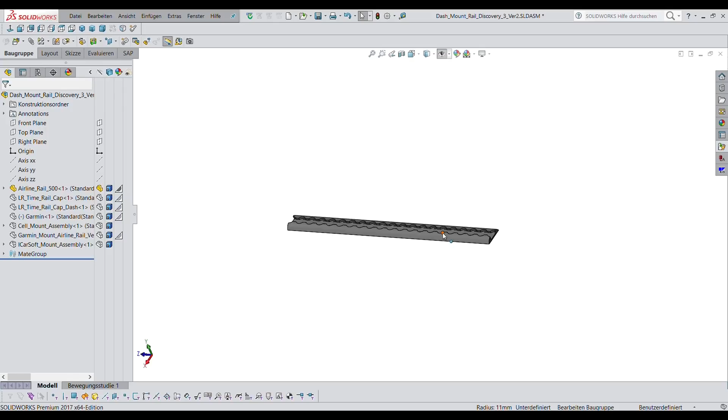You happy? Yeah. I want to show you our new airline rail dash mount setup. You think that's the right name? Yes, I think that's the right name.

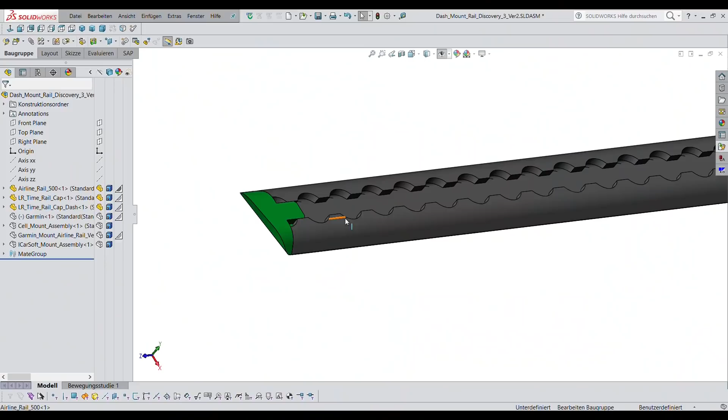I started out with a model of the airline rail, and then I added the end caps we already used before in the other video. But the one end cap on the other side needed a special shape. That special shape was not so easy to design, even if it looks like a very simple piece here.

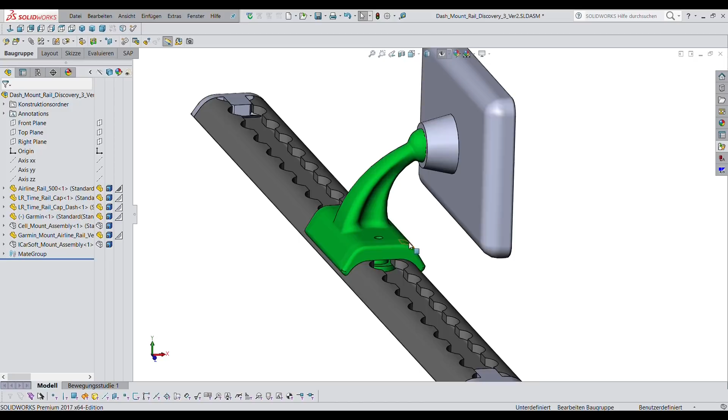The first thing I had to do is get our Garmin unit into the picture, and then I designed a mount for the Garmin unit. This mount is derived from the original Garmin windshield mount, and I just changed it a little bit to be able to fasten it to the airline rail.

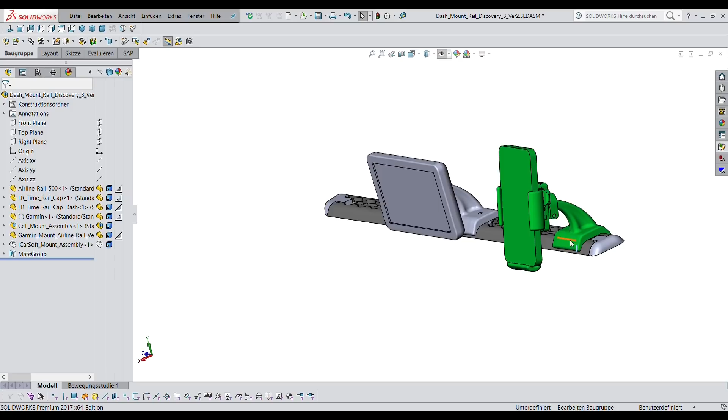Then I derived from this a cell phone mount for your cell phone. You're gonna get your own cell phone mount, and that is a way more complicated thing. So I mounted it all the way to the side. I wanted to have it in a way where we can install two different sizes of cell phones.

I wanted it to have the cell phone nicely centered, and I installed this mechanism here. So you can adjust it, and it's spring loaded for the two different cell phones.

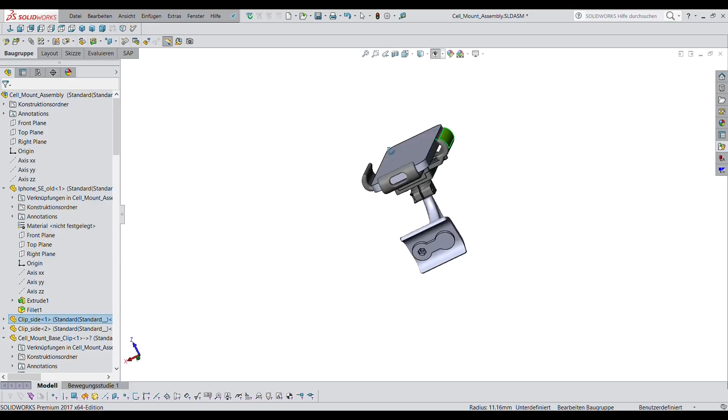I also put a little opening in here for the plug, and here you can see how it's fastened to the airline rail. So you just push it top down into the rail, slide it over a bit, and then there is a little M4 screw with a thumb wheel that you can tighten here.

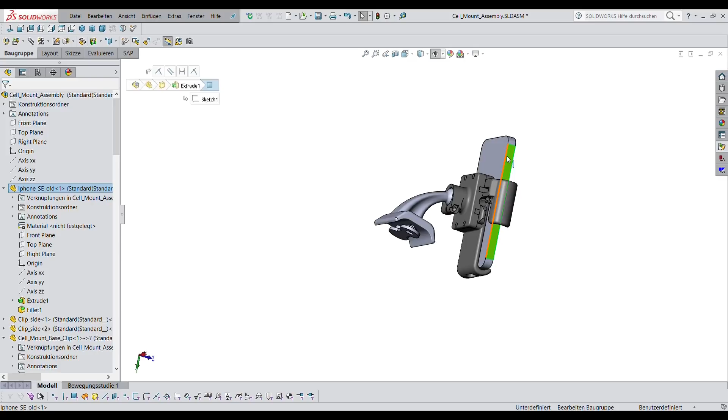And then I basically put in the same ball joint mount. There's a spring mounted between those two posts, and in order to get this mechanism to synchronize, I had to put in a synchronizer link.

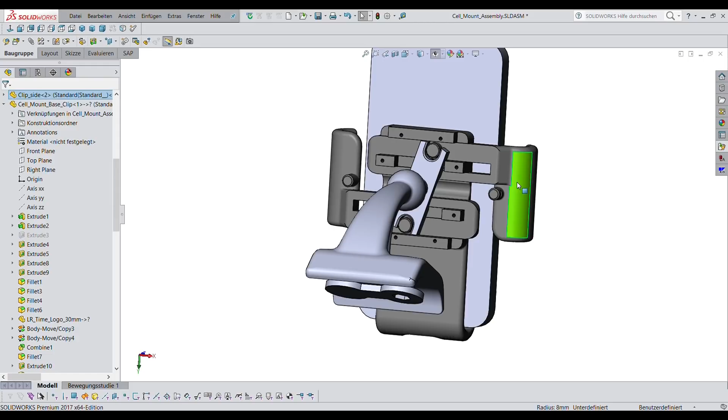So here you can see the synchronizer link. Oh, it's just unbelievable, I think I got a little carried away here. I think so too. Okay, that has now some sort of a German touch to it. Anyway, it works, you see here how the spring is riding in here.

So this thing is now able to accommodate both cell phones we own. Yeah, and I think many more. For the iPhone 5, SE, and 6, it's working great.

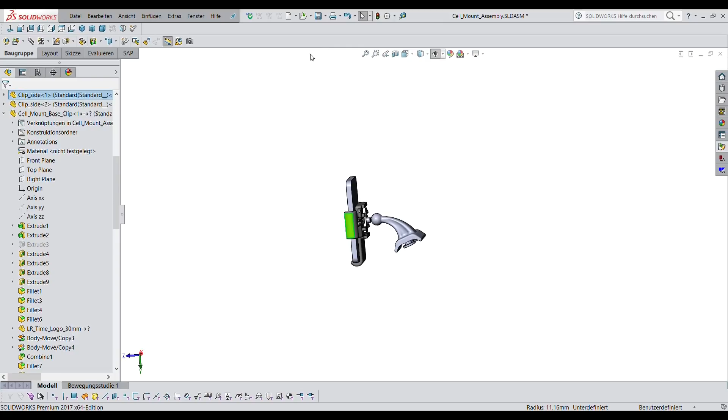The next thing I needed was a mount for the OBDII, the iCarSoft unit, because it's always lying around in the car, and it's the most important unit inside the car. So I basically derived a mount out of that cell phone mount for the iCarSoft.

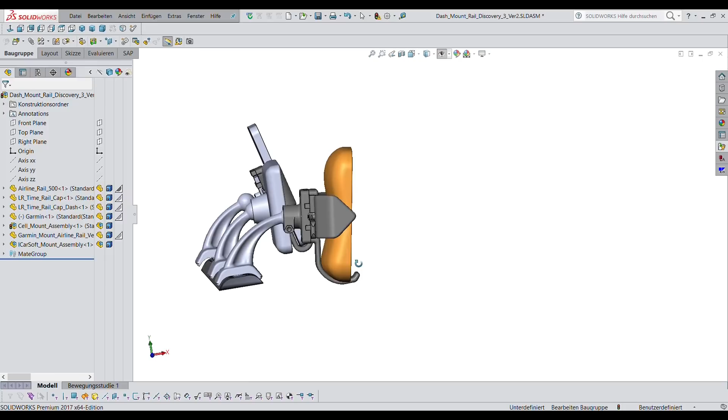I just changed the mount to be a little longer, because otherwise it collides with the dash. And then I increased the size of those latches holding it in place. Here you can see this. Hopefully this works.

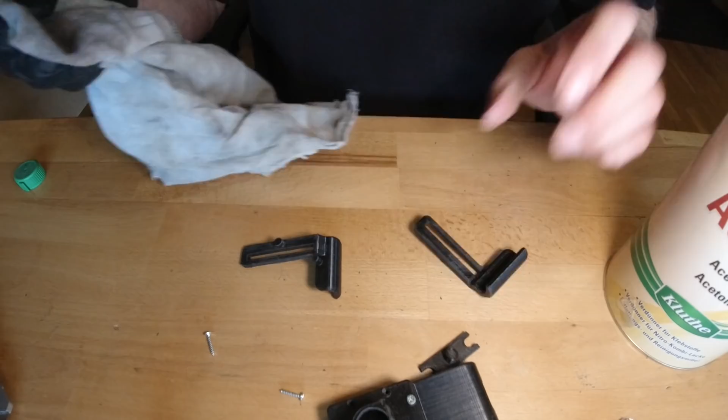Final assembly, let's see. This goes in here. The spring is supposed to go on there. Then this is the synchronizer link and the rear cover.

And then I'm gonna go and impress Vera with it.

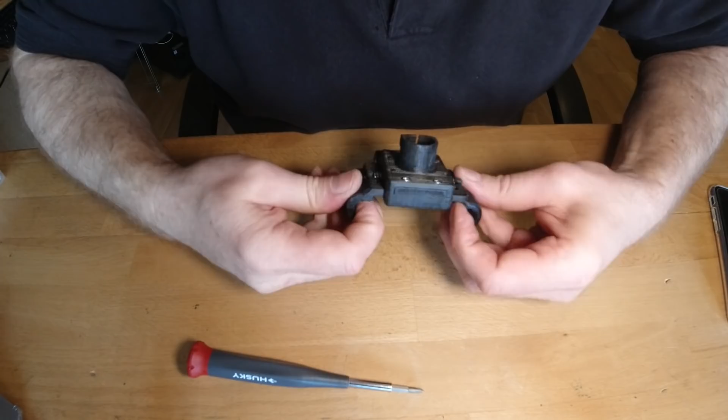Unbelievable. These pieces are printed sideways like this, so that they get more strength. The layers of a 3D printer, you have to imagine them like the grain in the wood, and you can print components and make them much stronger by aligning the grain into the correct direction. This is what I tried to do here.

I intended to make a clamp, so I can clamp this ball connection, but it broke away and I filed it away.

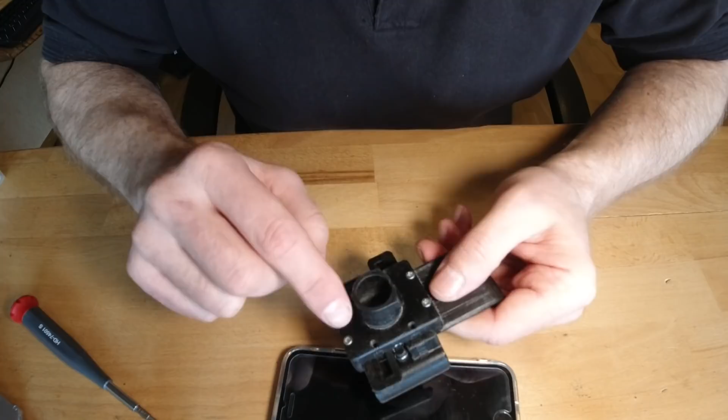So I really have to make a new backplate where I change the design of this clamp, and I also got to get rid of these 4 holes.

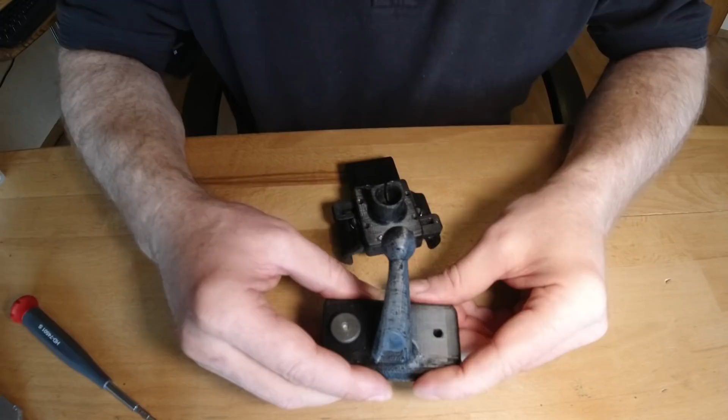Let's see if this ball works now. This is the mount for inside the car. It also has a clamp mechanism here. You can clamp this up and down, see? And just insert it straight in and slide it back and forth. And it's got to go in here now.

I'm a little bit afraid to put this in, see if it cracks, but it does go in. There, I would say this is a little tight. It feels like it could crack.

Maybe I got to give this a wipe with acetone, this ball, so it becomes a little smoother. A little bit of acetone, wipe that ball. It kind of has this polishing effect.

One of the viewers gave me this hint, and it's a great hint. Since then I always rub my components with acetone, and boy, that makes a big difference because they become all smooth. You can grind them with sandpaper, and after that they get a matte finish. Yeah, this is much better.

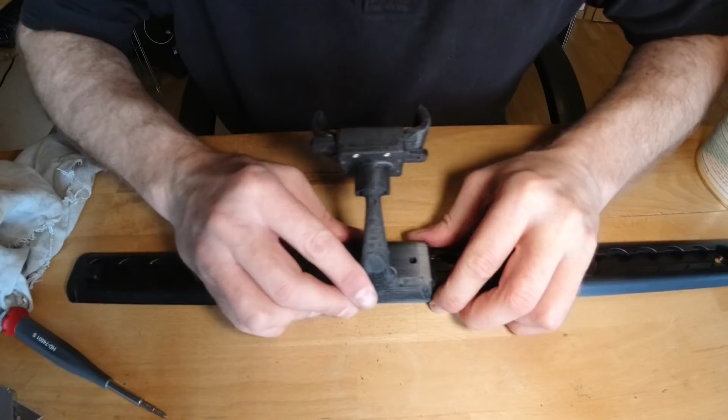So if you think about this as the airline rail going into the car, I can put this in here, slide it back and forth, and whenever I'm in between holes, I can turn this little nut, and now it's tight.

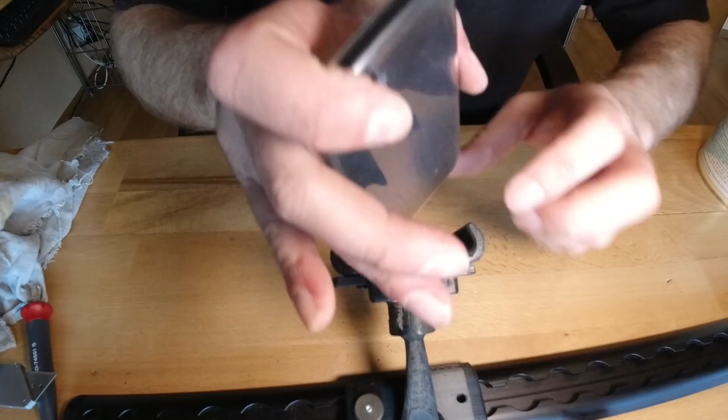Damn. Loosen this shell, slide it, lift it out. This sucks.

Well, luckily I have a second one, and I'm gonna make this ball even smoother.

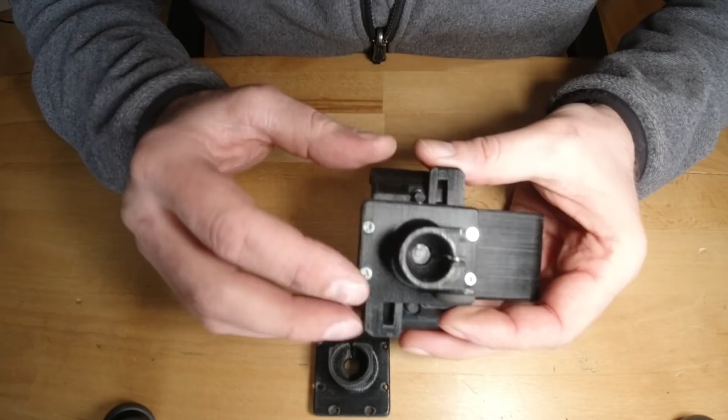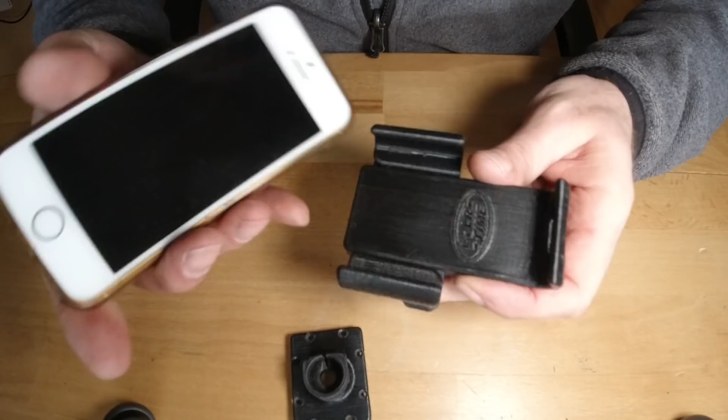We got now the cell phone mount finished. So I made a few corrections and made a new back plate. And here you can see I also got an option to clamp it here with this little thumb wheel. This thing works now. See, it's got decent spring force, connection for the opening for the plug, got my logo in it. You can insert it in here. Works pretty good. Yeah, this is good.

And then, my cell phone also fits in. Got enough stroke in the clamp. And you can loosen it, set it in, slide it, and tighten it.

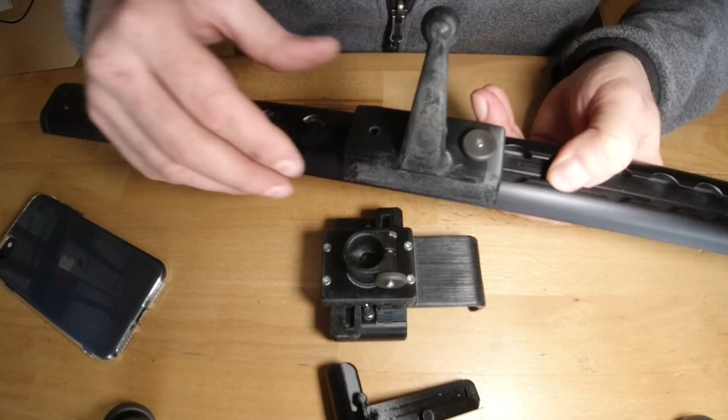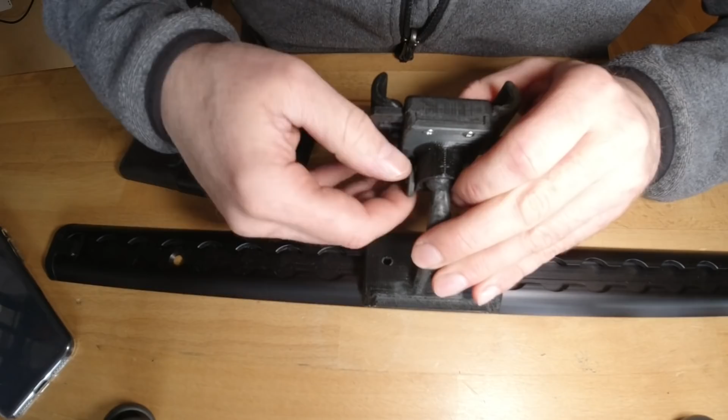And this thing then mounts to the Garmin GPS. And then I can also mount the cell phone mount to the same interface. I'll make sure this is unlatched here. So this goes in here. Now I've got it on the airline rail. I can also use the original mount from the Garmin GPS, and use that thing to attach it to the windshield.

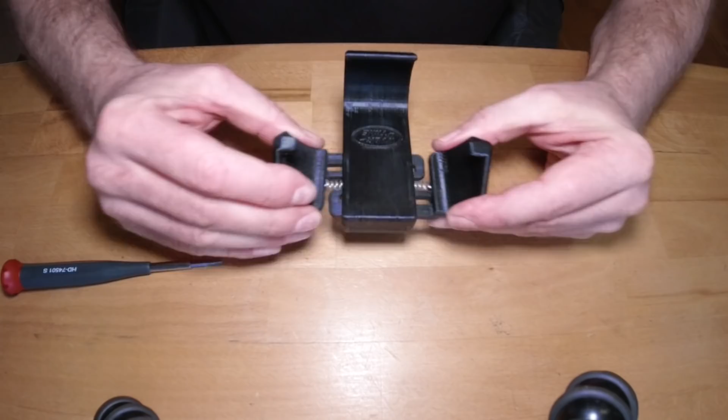Okay, are you ready to install this thing now? Yes, I am. You sure? Yes, because I'm using the permanent tape, okay? There is no going back if this thing is attached to the dash, okay? So it better be right.

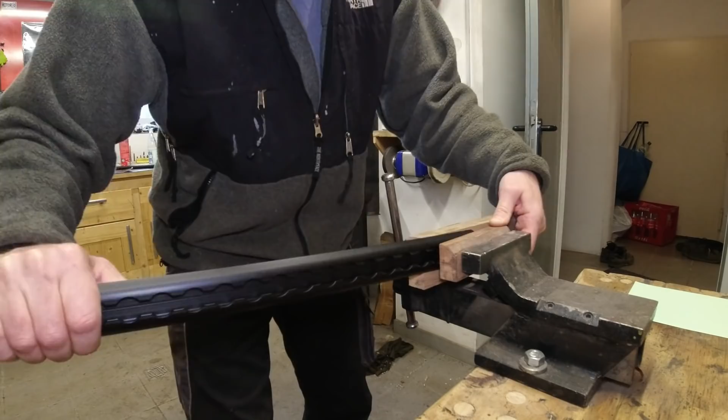I got this rail slightly curved in the vise, so it matches this shape, because even though the dash looks kind of straight, it isn't. It has a curve to it. That was really hard to bend this stuff. And right now I think I got it matched pretty good, and I'm really ready to put bolts in here.

Do you think we can do that? No.

Okay, 3M permanent. I wiped down this section of the dash lightly with acetone. So you have to be really careful using acetone. When you get it onto plastic, it really dissolves plastic. So I wiped it just once and done. It just takes the softness out of the plastic in the top layer.

Yeah, are you impressed? Yes, I am. Okay, don't overdo this or you will wipe off all your grain here.

We'll put the end caps on here, like this, and like this. It's now short enough to not disturb the airbag over there. And this end is made in such a way that it matches the shape of the dash somewhat.

So this is stuck now really good because I wiped it with acetone, yeah? An airline rail as a dash mount rail. I don't think anybody has that.

Okay, now what we got, here's my box of printed goodies, yeah? What we're gonna do now is mount the Garmin unit. So for the Garmin unit, I made this mount, and all we gotta do is slide it in, move it over a little bit, and tighten this knob. Yes, yeah? Now it's tight.